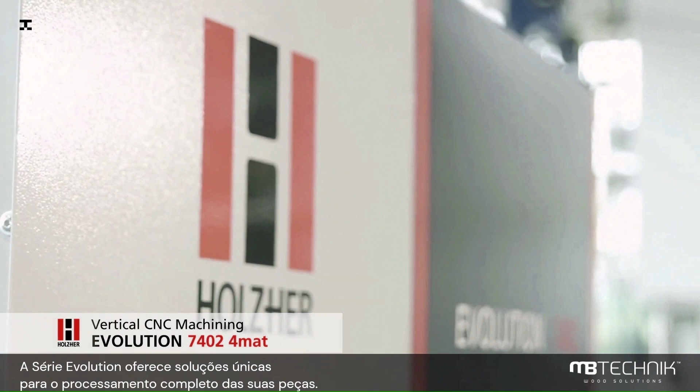The Evolution series offers unique solutions for complete machining of your workpieces. The vertical machining centers from HOLZHER have proven themselves in workshops thousands of times and convince with their versatility, simple operation and extremely stable design.

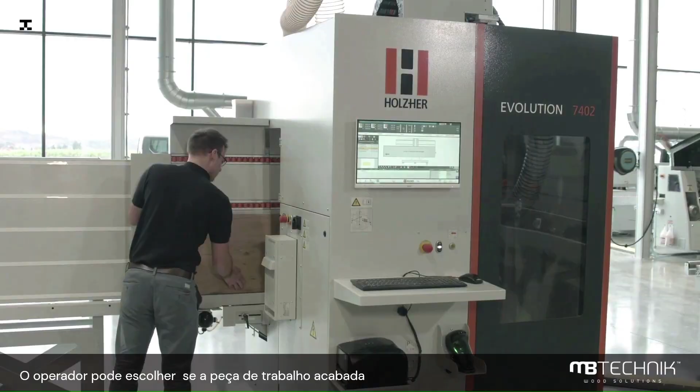On less than 5 square meters, the Evolution 7402 4mat offers the possibility to completely format panels on all 4 sides, saw back wall grooves and drill all connector holes. The operator is free to choose whether the finished workpiece is returned to the loading station for efficient one-man operation or whether it is to be produced in throughput.

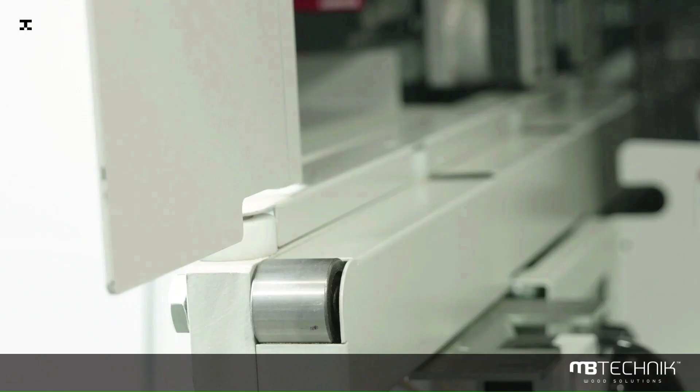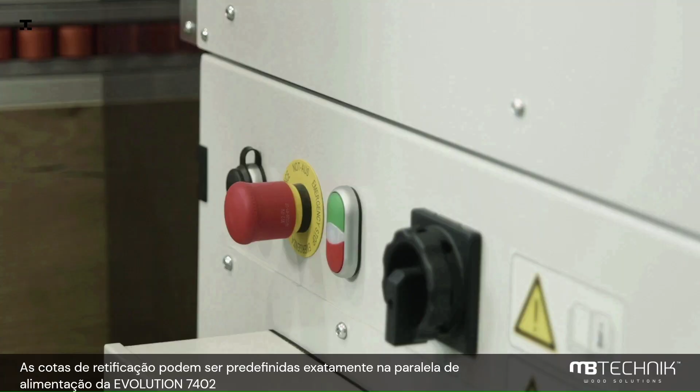Stable roller conveyors and supports ensure gentle and precise workpiece transport. For the absolutely precise milling of all 4 workpiece edges, the joining dimensions can be preset exactly on the in-feed fence of the Evolution 7402 4mat.

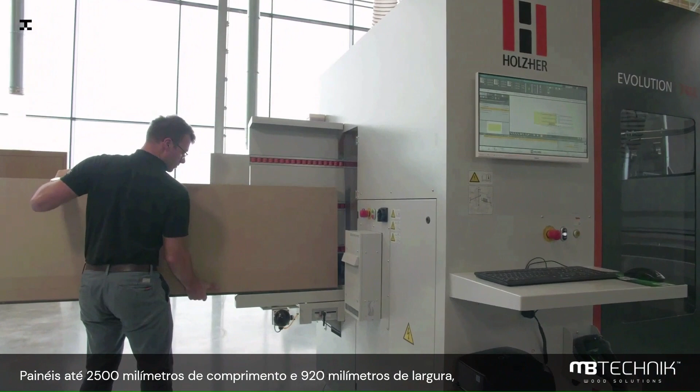Panels up to 2500 mm long and 920 mm wide and weighing up to 75 kilograms can be processed without additional support of the workpiece.

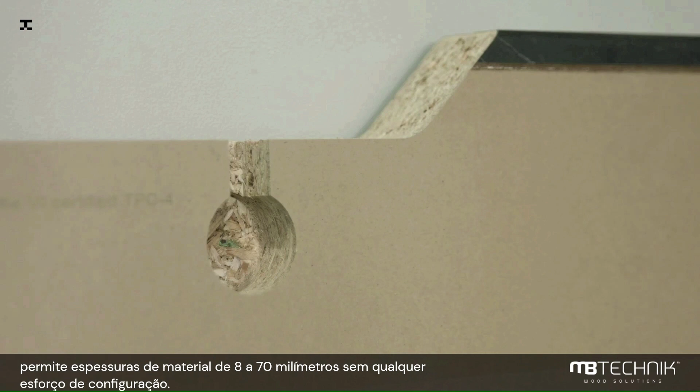The fully automatic workpiece thickness adjustment allows material thicknesses from 8 to 70 mm without any setup effort. Even very small workpieces with 20 to 70 mm are no problem.

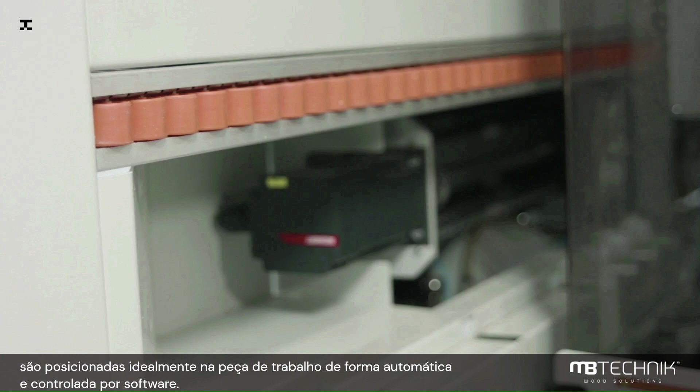The material protecting vacuum cups, in combination with the energy-saving EcoVac system, are ideally positioned in relation to the workpiece, fully automatically and software controlled. The vacuum is activated via the ergonomically mounted mushroom button and then the machining program is started.

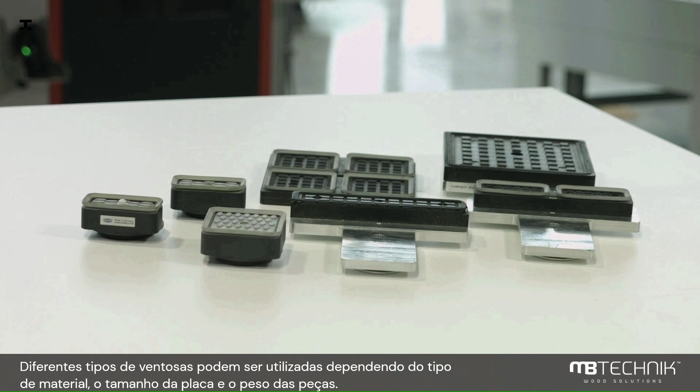Different suction cups can be used depending on the material, the plate size and the weight of the workpieces. This ensures safe handling even of sensitive panel surfaces and for modern solid surface and composite materials.

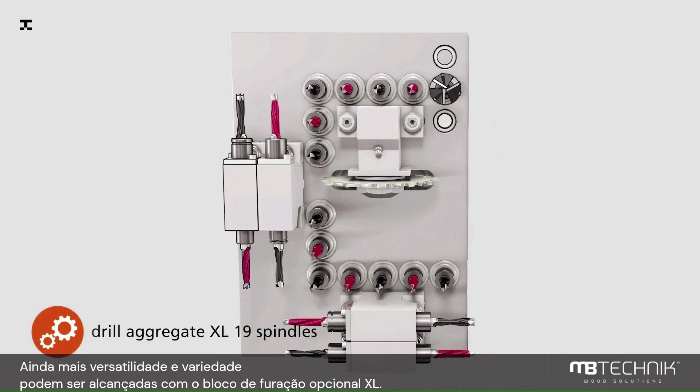Every Evolution comes with a fully equipped drill head for line and horizontal drilling in X and Y direction, as well as a grooving saw. Even more versatility and variability can be achieved with the optional XL drill head.

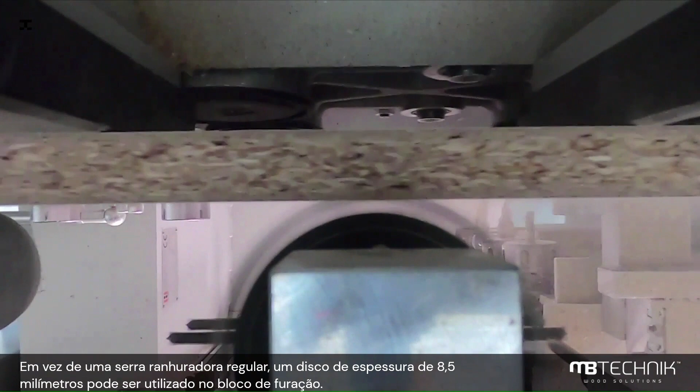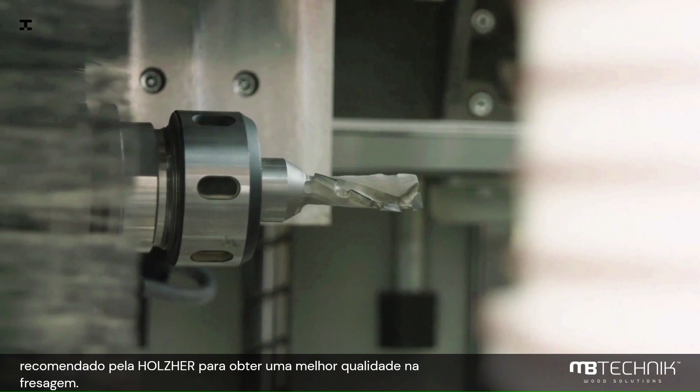Instead of a regular grooving saw, an 8.5 mm grooving disc can also be used on the sawing station in the drill head. This makes the processing of furniture components with 8 mm back panels, including all necessary drillings, even faster and more efficient. The powerful standard milling spindle is supported with a diamond-tipped formatting cutter, recommended by HOLZHER for best machining quality. The results are precisely formatted workpieces, perfectly machined on all edges and the surface.

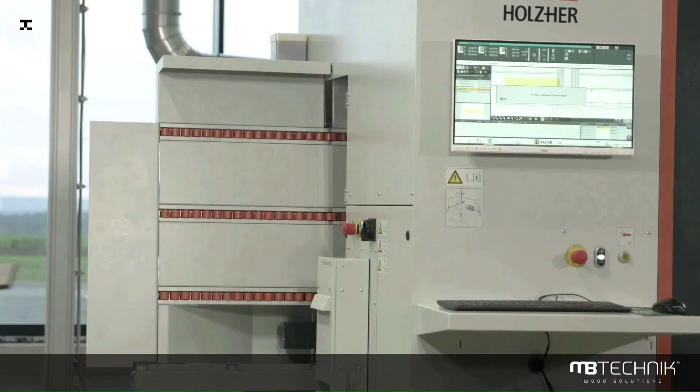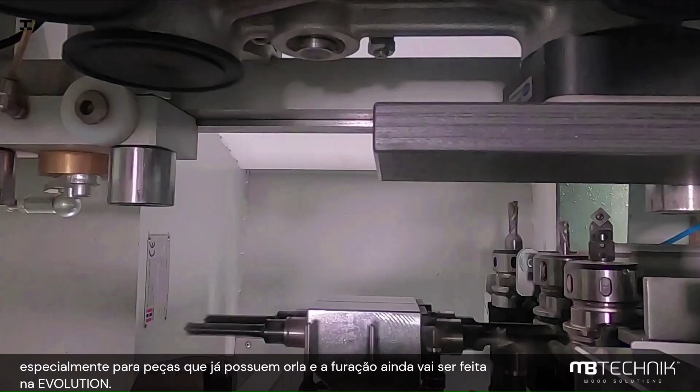A further highlight is the workpiece length measurement via the laser supplied with each Evolution, especially for workpieces that already have edges and are to be drilled on the Evolution. This guarantees an exact position of the connecting and linear holes. Fluctuations in the edge thickness are automatically compensated by the software.

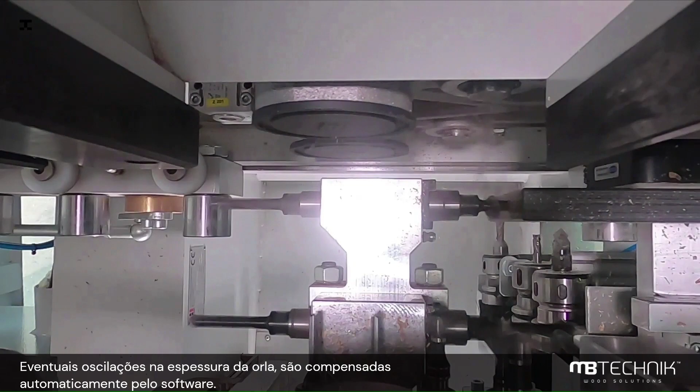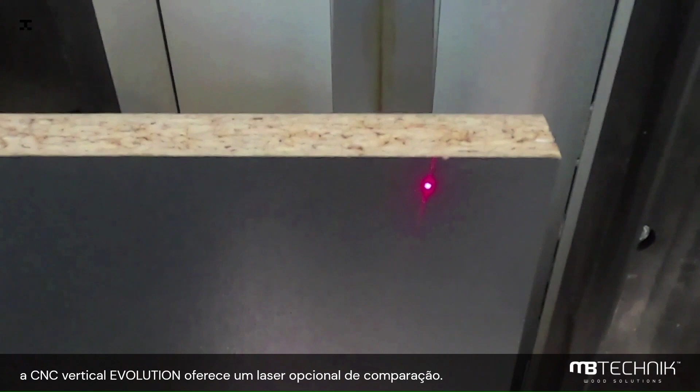In order to check the height of the workpiece and compare it with the activated machining program, the Evolution CNC offers an optional laser plausibility check. The workpiece is measured by a fast test run, thus minimizing operator errors and material waste.

The Campus software package included in the machine offers a wide range of field-tested macros for easy operation, allowing the user to quickly generate the necessary machining programs.

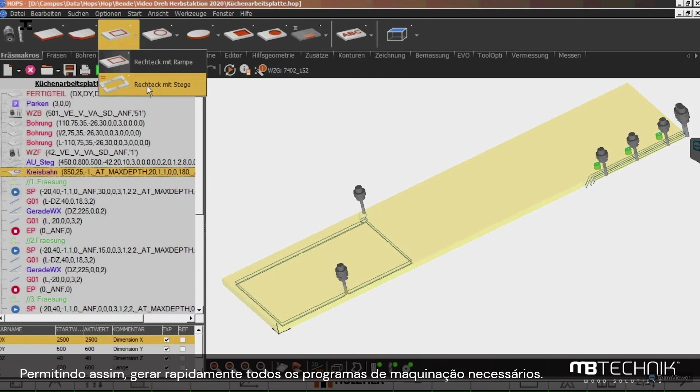Via the so-called Easy Snaps, the operator always sees the reference points from which the program is programmed, an important feature to avoid machining errors and thus scrap.

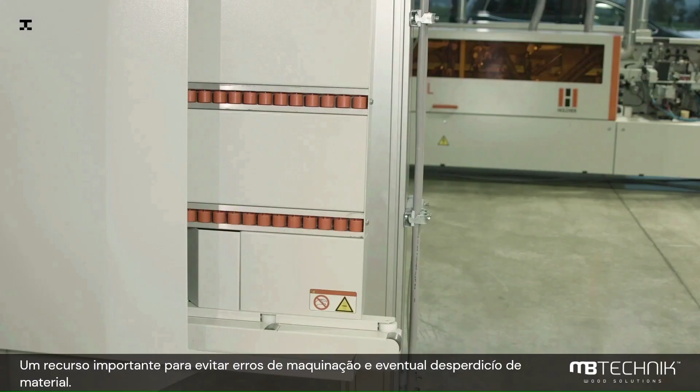Especially for the vertical Evolution models, the option of automatic bridging for cutouts in worktops is also extremely helpful. For very long workpieces, the scene module contained in the software also calculates several clamping situations. For complex machining operations, these clamping scenarios can also be influenced very easily using a standard macro.

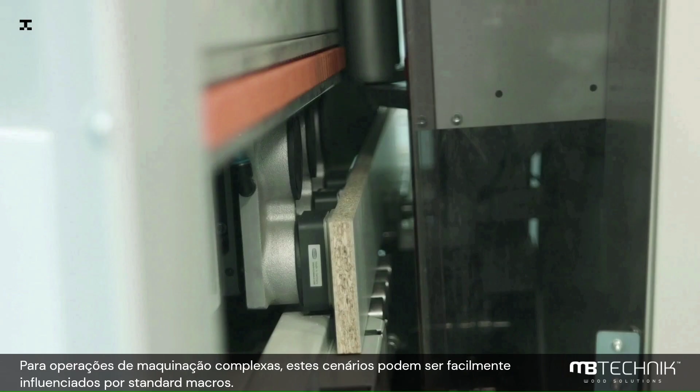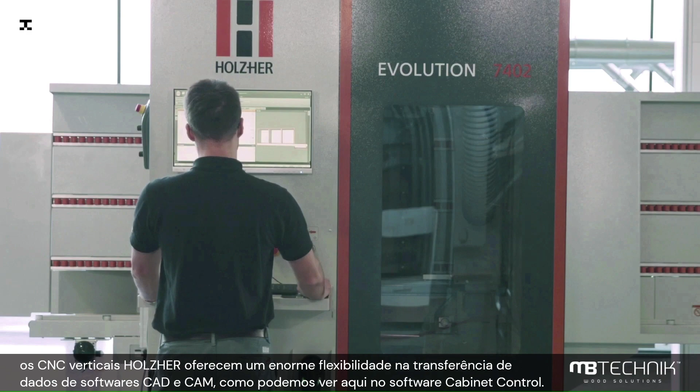Thanks to the open interface to post-processors, HOLZHER machining centers also offer enormous flexibility in data transfer from leading CAD, CAM programs, as here with the kitchen designed in the cabinet control software. CNC programs can be transferred to the machining center and processed without detours and further programming effort.

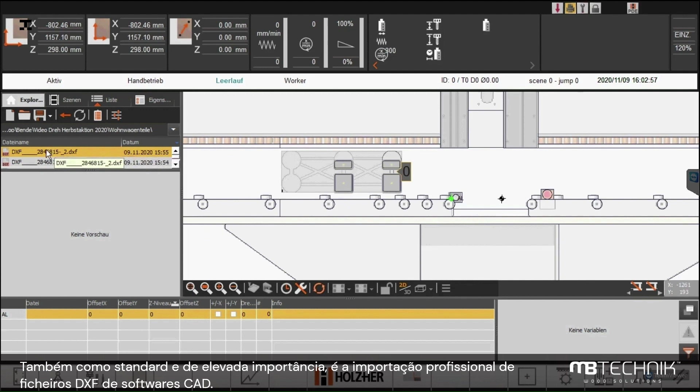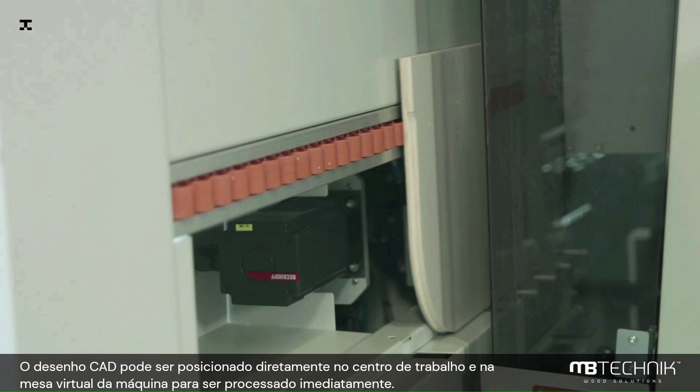Also standard, and of growing importance, is the professional DXF import of components from CAD software. With suitable layers, the CAD drawing can even be placed directly on the work center and thus virtually on the machine table and then processed immediately.

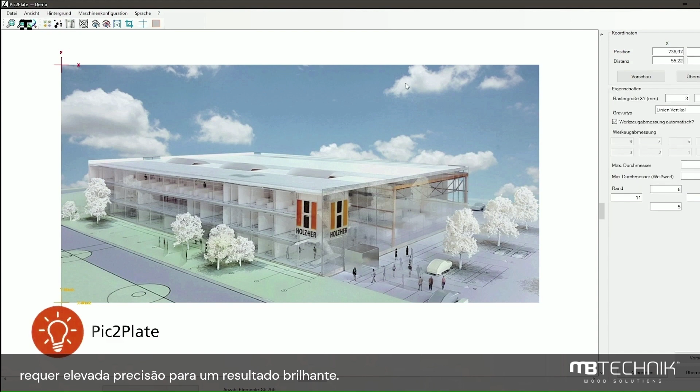Optionally, the standard process simulation of machining operations can be extended to the BetaSim 3D simulation with material removal shown here. The so-called light reflection milling with Pic2Plate software requires the highest precision for a brilliant result. Even this demanding processing of HPL compact panels for facade and interior construction is no problem for Evolution.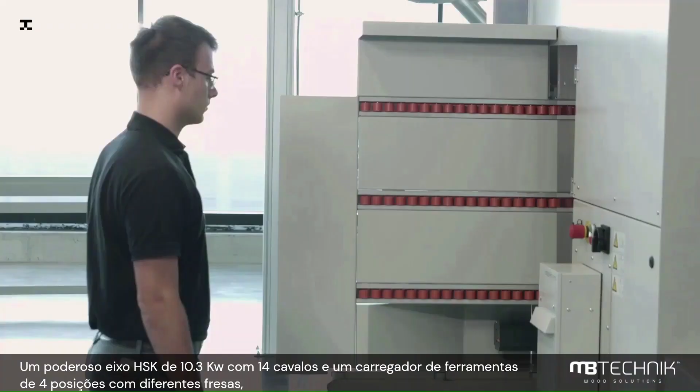With the optional Quattro HSK package, the Evolution 7402 format becomes an all-rounder and gets you ready to implement countless design ideas. The powerful 10.3 kilowatt, 14 horsepower HSK spindle and the 4-position tool changer with different milling cutters allow not only edge profiling but also complex surface processing such as profiles, grooves, points or lettering.

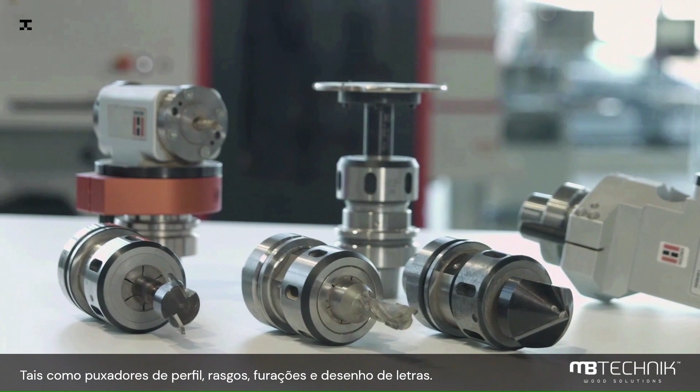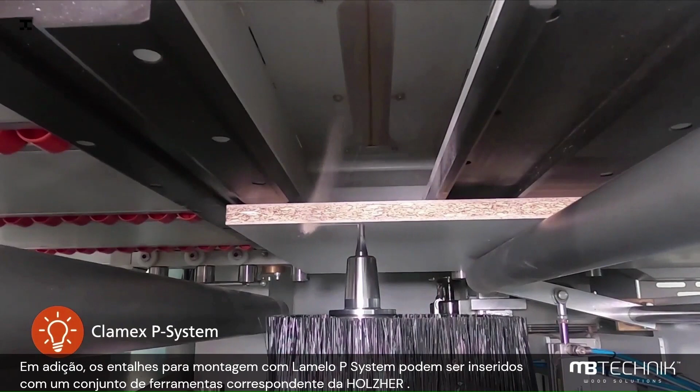A manual tool change is also possible at the push of a button. In addition, the pockets for the Lamello P-System connectors can be inserted with the matching toolset from HOLZHER.

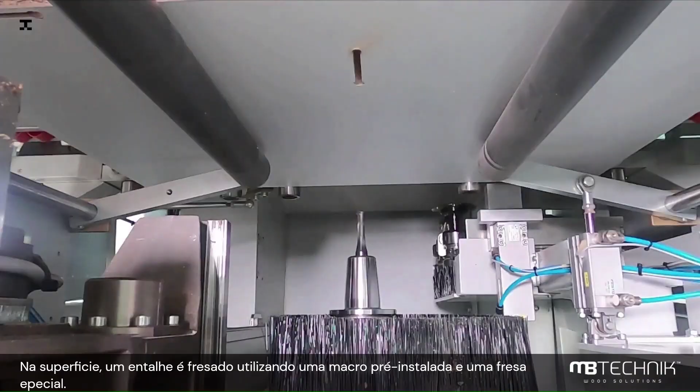In the surface, the arc pocket is milled using a pre-installed macro program and a special pin milling cutter. The Clamex pockets are inserted into the workpiece edges with the matching milling disc. It is so easy to fit furniture with modern connector technology.

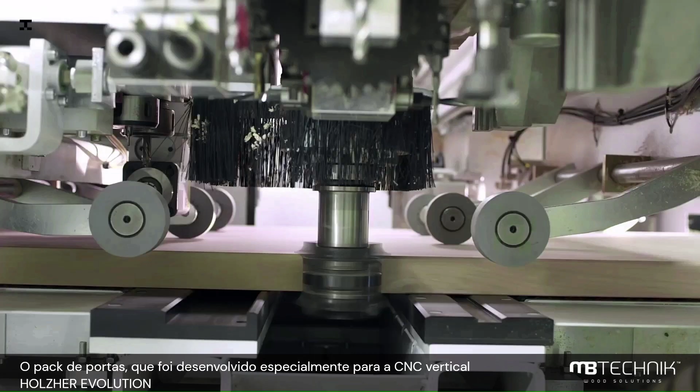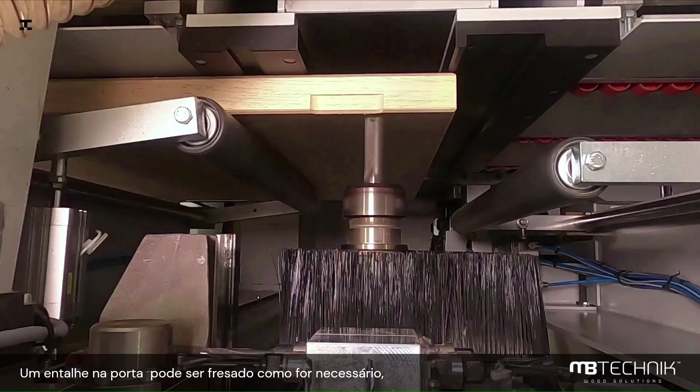The door package, which has been specially created for the Evolution 7402 with the Quattro HSK option, also allows the processing of flush-fitting interior doors. A door leaf blank can be formatted as required, and the handle hole, the lock case, and the pockets for the hinges can be individually adapted to the fittings used.

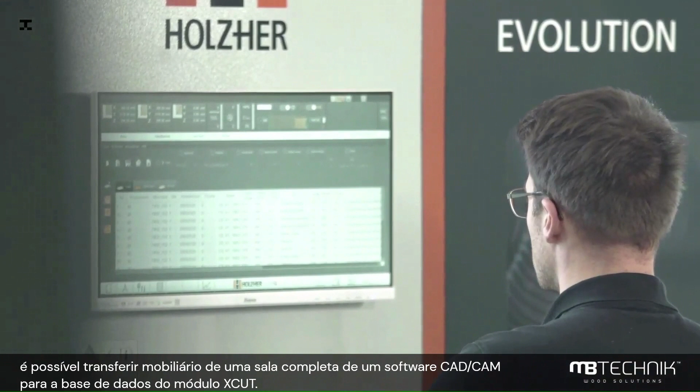Whether you program individual parts in the Campus NC Hops software or, as shown here in the example of Palette CAD, transfer the furniture of a complete room from the CAD CAM system to the warehouse database of the X-Cut module. The clarity of all components of the orders to be produced and the unique simplicity of the software operation is always given. One push of a button is enough to send the workpieces to the machine as jobs sorted by strip width.

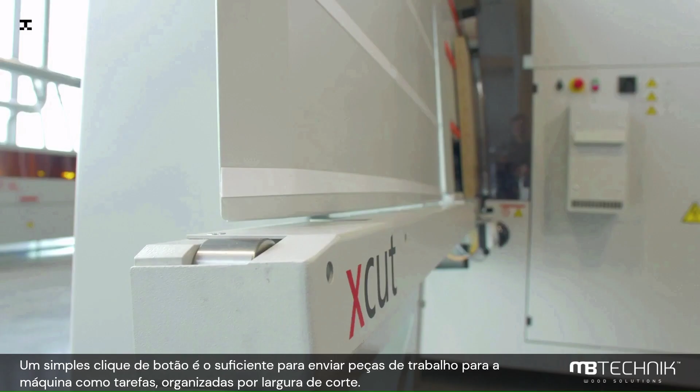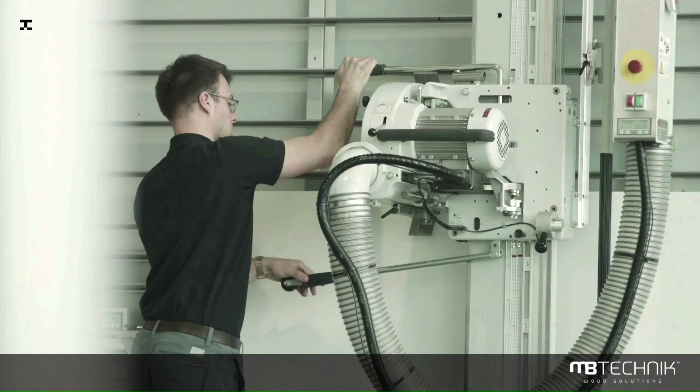With the X-Cut package for Evolution, the vertical CNC automatically generates the required workpieces from previously longitudinally cut plate strips. With the X-Cut package, you completely avoid the otherwise necessary crosscuts.

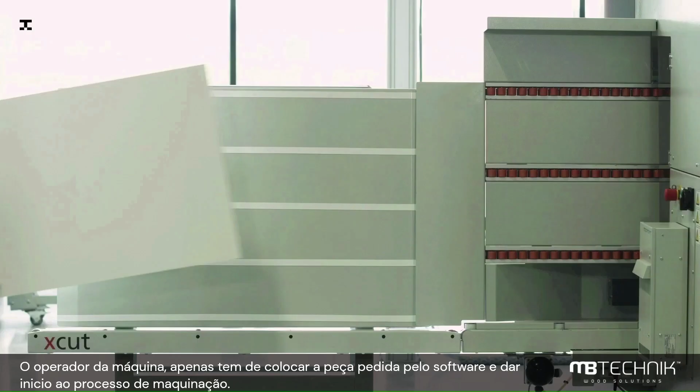The software for the X-Cut mode lists all pending jobs on the machine. This gives the machine operator a perfect overview of all jobs and the required strip material. The machine operator only has to place the plate strip requested by the software and start the respective job.

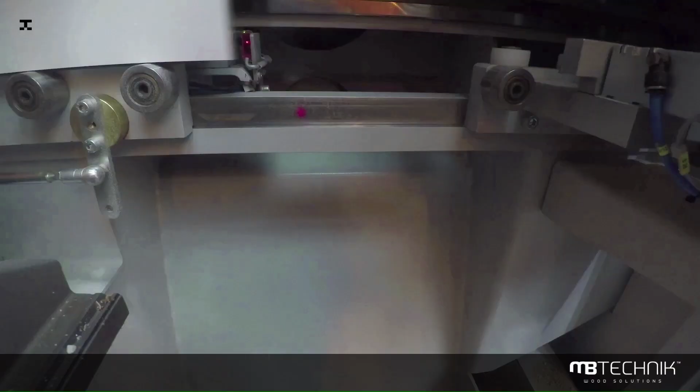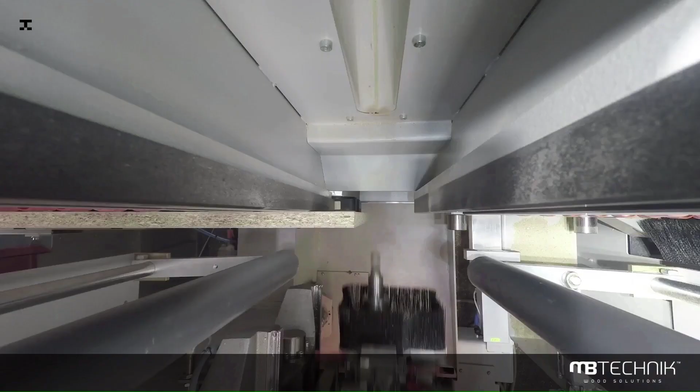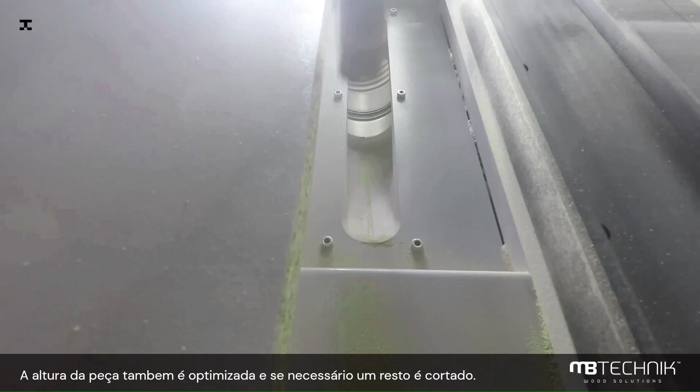With this processing method, the strips are measured fully automatically, checked for plausibility, cut to length and finished. A second length laser automatically recognizes the end of the panel. If necessary, a remnant piece is produced which the machine operator can then easily remove. The height of the strip material is also optimally utilized and, if necessary, a remnant piece is cut off.

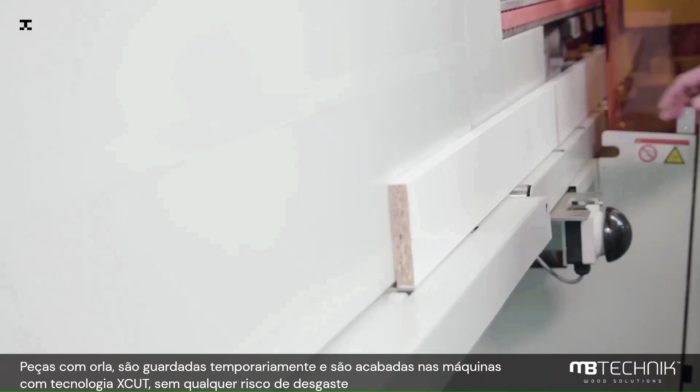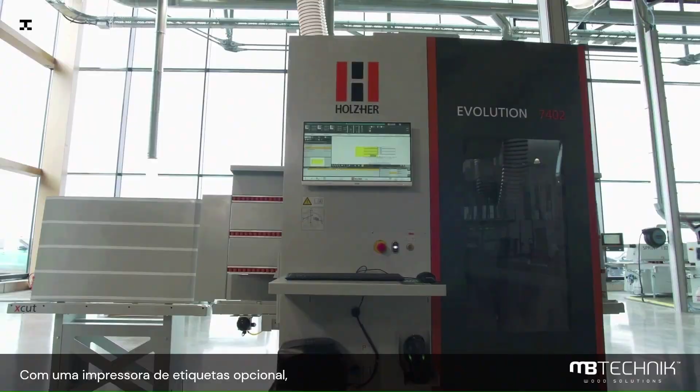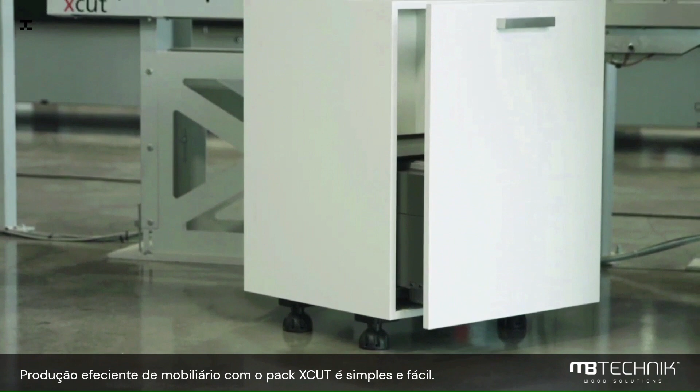Workpieces can of course also be processed as semi-finished products. Panel strips with edge banding are stored temporarily and are finished on the XCUT machines without any tearing using a special semi-finished product macro. With the optional Easy Label printer, labels with important information such as edge position, component description and commission are generated. Efficient furniture production with the XCUT package is that easy.

The Evolution 7402 format, the flexible machining center from HOLZHER.